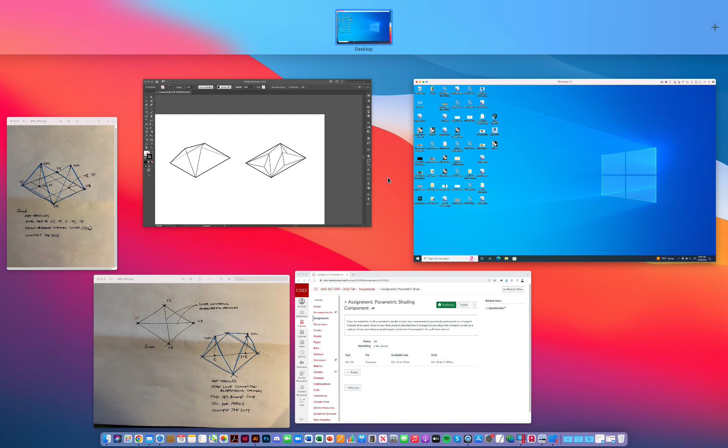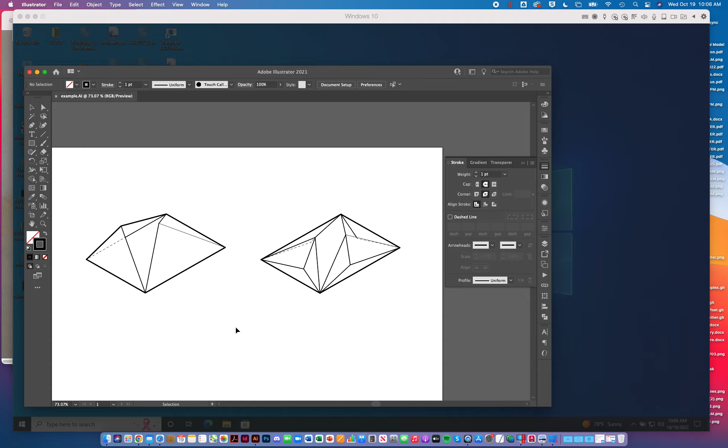Right, so, if this was me, maybe I'm doing this on paper or whatever, let's talk about it like you guys have. So you would have a prototype that looks something like this or that or whatever. Yours are all different, but you get the idea. So from the paper prototype, it's very simple. This is what I do.

I get out the paper and the pen and I just start to sketch a little bit, trying to figure this thing out step by step. Very simple diagram. Took me literally 30 seconds to do. Took me longer to write these steps than it did to actually draw the drawing. So what did I start off with? Just a quad, square, rectangle, and axon. Then I'm sort of mapping things out. Where do I need points? Where do I need to project up?

Where do I need to project out? What do I need to do in order to connect these things up in order to create these triangular surfaces that are basically folded paper surfaces, right? Okay. And so, step by step, I'm sort of thinking about this.

Let's get the vertices, the 4 vertices of this, what do you call it, this quad. Let's evaluate the surface at 2 different points, one towards one corner, one towards the other corner. Let's project up from there with the normals using that start point direction length line tool. And then from there, we get a bunch of points in space to start to connect up, right? To connect the dots. All right.

This is how I recommend you start, right? Like you look at your paper thing and say, okay, I have my frame, that's the quad, draw that. Now, I can build from this quad, how do I begin to build this component? All right, so let's do that. I'll do this from scratch, why not?

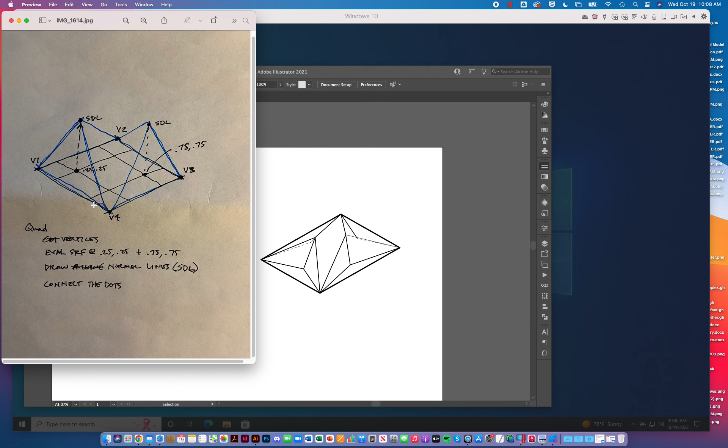Should have Rhino starting up in the background. Here we are. All right, so I'll keep this up so we can refer back to it, and then I'll keep this up so we can refer back to this one when we do a second one. All right.

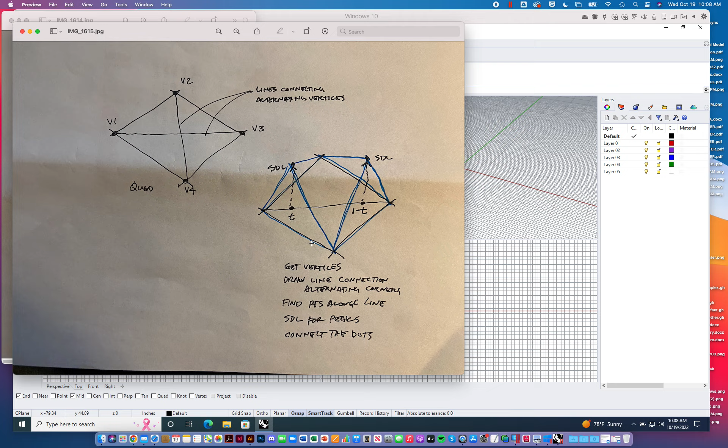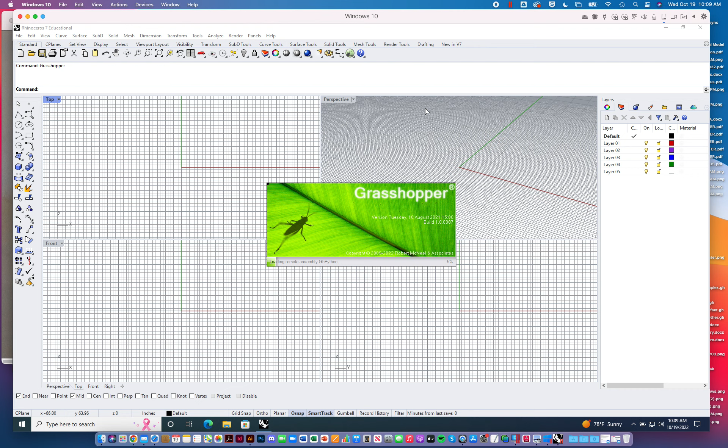All right, so let's think about that recipe. I just made my algorithm, right? This is the way to make my Toll House cookies from this quad. Just going back to the very first day, right? All right, so let's do this in Grasshopper. I'll open it up. What's the starting ingredient? What's the ingredient I need? It's not flour or chocolate morsels or vanilla extract. What is it? What do I need? Quad, yes.

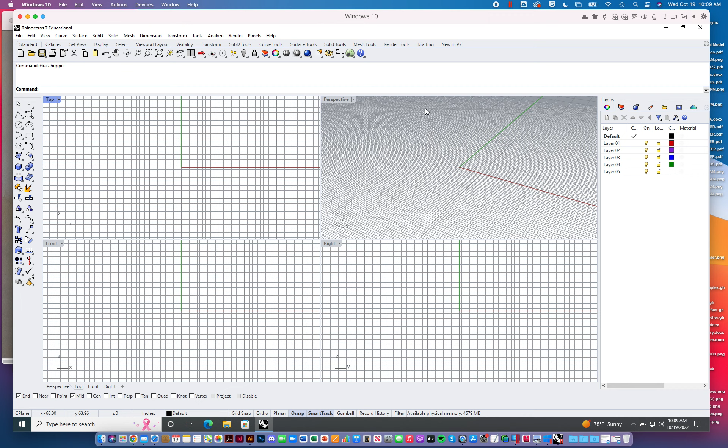I need a quad. I can make this component on any freaking quad you throw at me, right? If I make this from a quad, that's the starting ingredient, the only ingredient I need, then I can make hundreds, thousands of these, right? All I need is a quad, or hundreds or thousands of quads, right? All right, so, options. Let's see. And that's typically how this works, right? You have sort of like starting conditions, right?

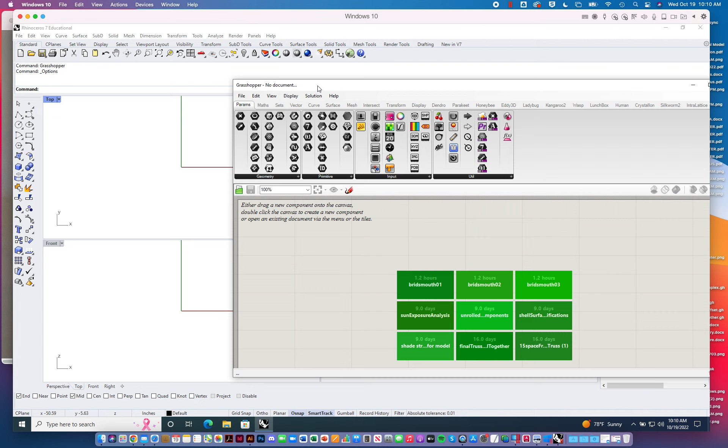Again, when I break down a surface, the easiest way to do that is to break it up into smaller pieces. And the easiest way to take a NURBS surface or really any kind of part of a building envelope is to start to break it up into quads. What are half of quads? You cut them diagonally, you get triangles, right? Very simple. We talked about this with the planar fabrication structures presentation the other day, right?

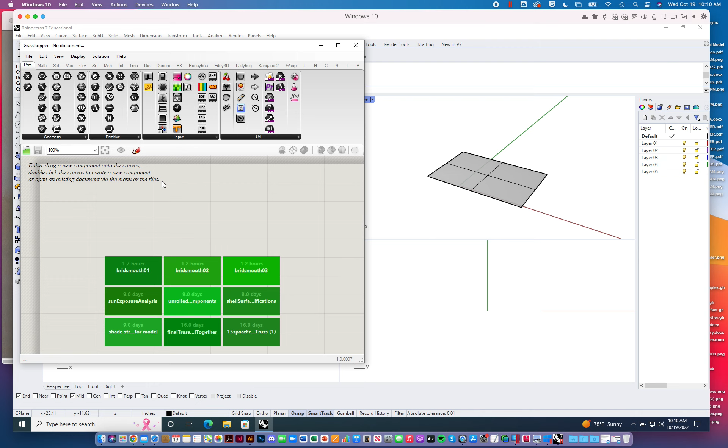All right. In Rhino, I'm just going to draw a quad. Do this several different ways. I'll just use the corner to corner. Let's make a rectangular plane right here. There we are. And I will set this to ghosted or something like that. And let's just take a look-see. All right. Here we are. I have something in Rhino. I want to bring it into Grasshopper to build up with it parametrically. What do I need to do?

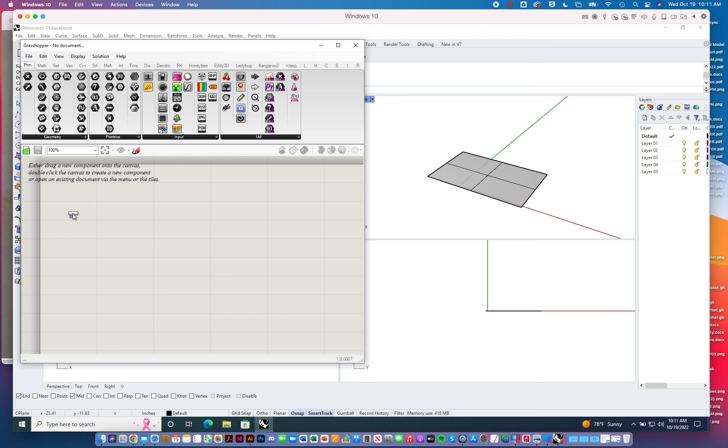You go to my params tab, right, and find the type of geometry that I need, whether it's a point or a curve or a surface or a mesh or a polysurface or a number or a vector, right? It's all here. Surface right there. And I can right click and say set one surface, Grasshopper disappears, showing me Rhino, allowing me to select the Rhino geometry that I want to reference back into Grasshopper, right? We've been here before, right? Okay, yeah. Great.

Now I can even turn this off and just see the Grasshopper preview of it, right? There it is. Ta-da. All right, so visually maybe this helps us see a little easier. What's next? Here's the recipe. What's next? We start with the quad. What's next? Yeah, vertices. That's right.

We're going to get all 4 vertices of this quad, right? Since it's a quad, we know it has 4 sides, and therefore 4 vertices, right? It even has a little face, right? And so let's do that. Let's take this piece of geometry, let's explode it to find all of its constituent pieces, right?

So I'm going to go to the surface tab, since that's what we're dealing with here. I'm going to go to analysis. I'm going to say deconstruct brep. This is a really interesting little widget here. Besides looking like some sort of piped surface exploding or on fire, just kind of a cheesy icon, right? Brep is just a fancy word for polysurface.

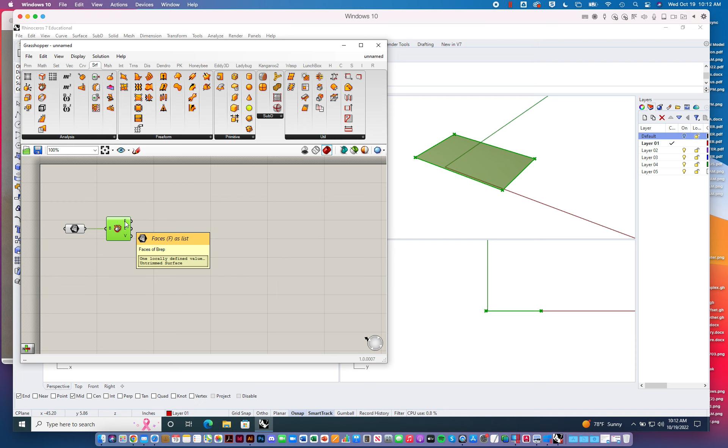Now it's going to give us any faces, any edges, any vertices. We're just going to give it one surface, so it's going to be really simple. We're going to get one face, 4 edges, 4 vertices. Vertex 1, 2, 3, and 4. You can see they're just a simple list of 4 vertices. And if I move my cursor up, I get a list of 4 edges, basically 4 line-like curves in this case.

I like how specific that is. Interesting. Anyway,

Since these are a list of 4 items, we want to be able to pick out the first and second and third and fourth and start to connect things around. So let's break each of these out. Since we're using quads, the logic here is that we're always going to have 4 items in this list. So I'm going to go to my sets. This is where I can do all kinds of things with lists and sets of stuff.

Remember way back when we used to do this, I'll pull out a specific item from this list. So here I can plug in a list. In this case, it's going to have a list of 4 items. And then down here, it asks me for an index. In other words, do you want the first item from that list, or the second, or the third, or the fourth? So I give it an index to tell it which item in that list I want. So I'm going to plug this in.

Now you notice the index is set to 0. What does that mean? So let's think about this. You guys type things in Microsoft Word, right? You know how you can have numbered lists? It starts with 1, then 2, then 3, particularly when you do outlines. Computers do the same thing. When we have a list of items, we have the first, the second, the third, and the fourth in this case. Not a big surprise.

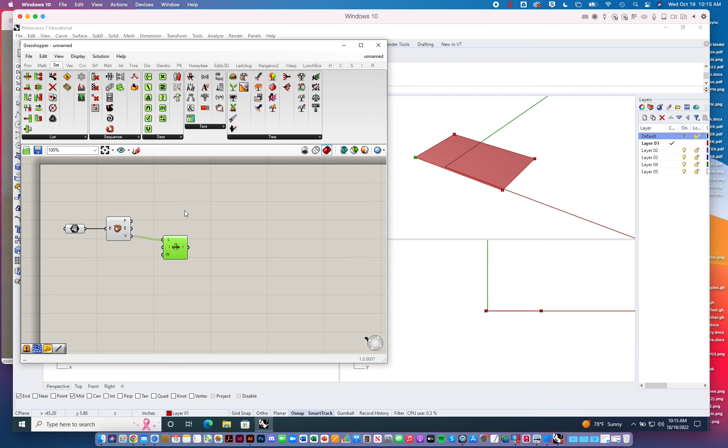So let's try it again. I'm going to copy and paste this, change the index, and set that integer to 1. So now we'll get the second item in that list with an index of 1. And there it is, 21.7, negative 0.717. Yep, it's that second one. So we can confirm that we really are pulling out the first, second, third, and fourth in their own little widgets here.

I'm just going to copy and paste, changing each one. For the third item, an index of 2. For the fourth item, an index of 3. I'm just right-clicking on the index input, going to set integer. So as I select these, there's the first vertex, the second, the third, and the fourth vertex. So we have 4 points in space now that we can use for our geometric jigsaw puzzle of simulating surfaces made out of paper, and eventually chipboard. What's the next step?

I want to start locating certain specific points on the surface itself, on that face, right? In this case, I'm saying 0.25 and 0.25. That's your UV coordinate, that latitude, longitude, right? Quarter of the way in 2 directions. And then 0.75, so 3/4 of the way, 3/4 of the way, also in the same direction. Does that make sense? I found that just looking at it and sketching it out really does help, right?

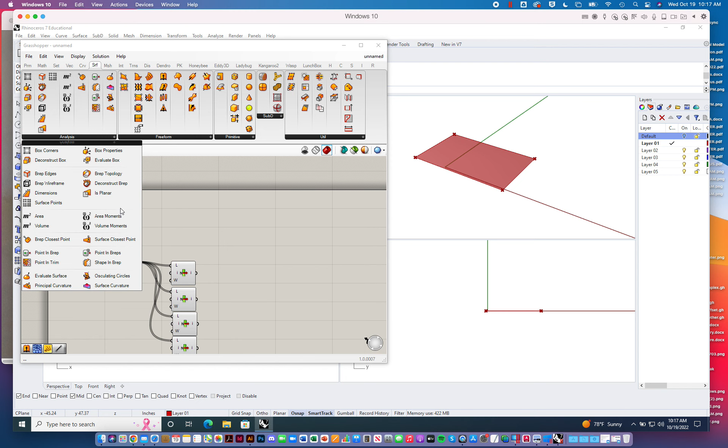All right, so we have the surface. We need to evaluate it at that UV parameter, right? And we have two different UV parameters to do. So let's do that right now. Let's see. This is a surface. I'm going to go to the surface tool. Remember, we can evaluate the surface at a UV parameter. There we are. Okay. So with a curve, we can evaluate a curve at a T parameter. Surface, we get U's and V's.

I don't know what happens when they run out of letters in the alphabet and they get down to Z.

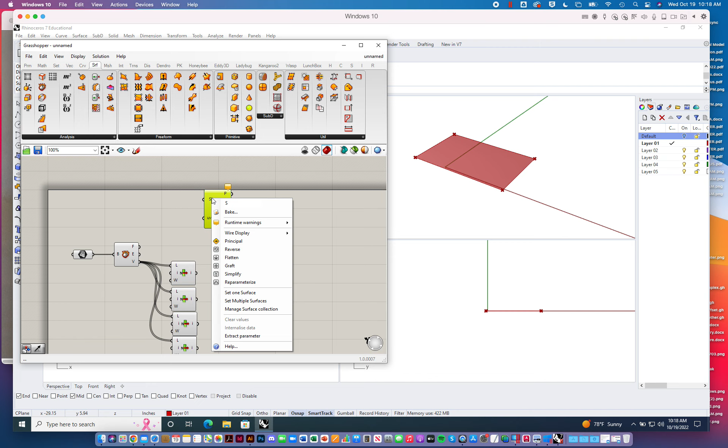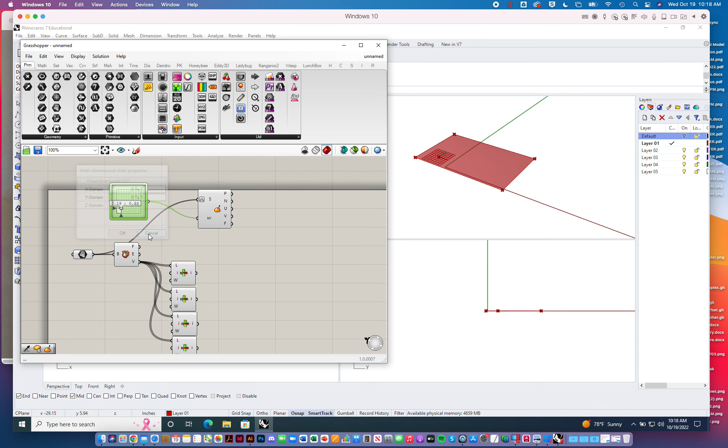But anyway, so there's a couple things here, right? We need to plug in the surface. We need to plug in the UV coordinate. We need to tell that to reparameterize the surface so it's from 0 to 1 in both directions, right? Otherwise, it might just be like some random stray length here for U and V. So reparameterize, plug this in, and just like we have a single number slider, we also have a multidimensional number slider here. So we can move this in two different directions to give us our UV coordinate. In fact, there it is. Oh yeah, look at that. Okay. I'll get this thing close to 0.25 and 0.25. There we go.

Now what's great about this is not only does it give us the location on that surface with the point, but it also starts to query a number of other properties. In fact, we can see that it populates the plane. That plane, and its orientation is tangential. So what you can do is you can begin to think about the latitude and longitude lines. If they have any curvature to them, you'll find the tangent for that curvature and then use that to construct the plane, right? That's important when we're doing a doubly curved dome, like you will be, once we take this recipe and apply it to a 10 by 10 matrix of these things across the grid shell.

For right now, however, we're just going to use a plane. It's probably intuitively obvious, right? Even if you're just casually observing, both of these lines, the U and the V's, are just going to be straight. And therefore, we're just going to have a plane that's going to sit on the XY plane, basically, right now. It also gives us the normal, so the perpendicular to that plane, which is really important as well. Okay?

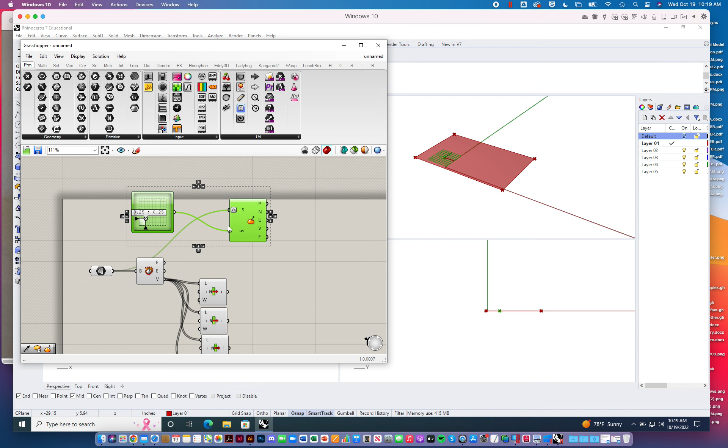Just going to go ahead and make copies of these and put them right here. And I'll just make another point. Just zoom in. Give this other friend a point here. There we go. Happy little points. This happy, nice surface. All right, so we have 0.25, 0.25, and we have 0.75, 0.75. And what's next? Well, we need to draw normal lines, so we need to project upwards, right? These dashed lines, these arrows, get these peaks, right? Just think what the Egyptians could have done with the pyramids.

But nevertheless, I think we're going to make shading components with these. So start point, direction, and length, and that's the first widget I'm going to pull out here. So I'll go to curves, primitives, look at all these line tools. There's line by start point, direction, and length. And this will be my start point. And the normal direction will be my direction. And then for a length, we'll make that a variable. We'll give it a number slider here, constrained from minimum -5 to maximum +5. Let's see what that looks like.

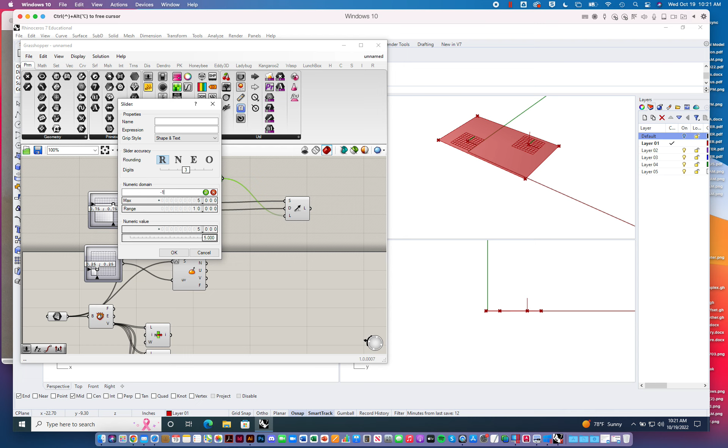Sometimes the up is down or the down is up. There we go. That works. Maybe I'll change the minimum and maximum here while I have this up: -10 and 10. There we go. All right. Great. And I'll do the same thing over here. So copy and paste this, and I'll replace the starting point and replace the direction, right, and make a line off of this point with its normal. Yeah, there we are.

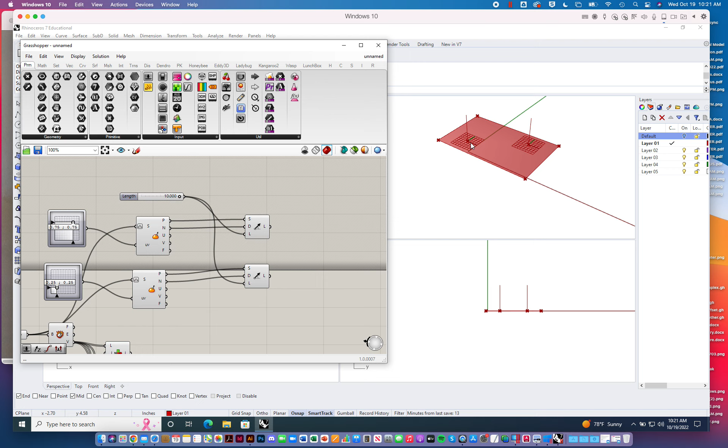All right. We have those lines. We need their endpoints, right? We need those points right where they hit in space. These are going to be our peaks in order to start connecting things up. And so I can query any curve and find all kinds of properties, including their start and their end points right here.

So part of this will be a refresher. There might be a few new tools in here, but you can go back through the video, sort of follow along, sort of understand what I'm doing. Right? So I can start to play off, and I'll do this here in another step for a different widget that adds a little more complexity, we'll start to build off of the edges of this quad. Right now, we're just building off the face and the surface itself, and then the vertices. Right? So we're starting to build more constituent geometry, same stuff we've been doing with points and lines.

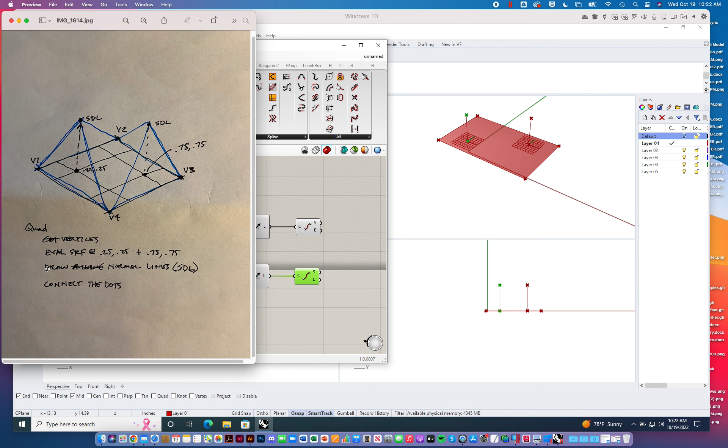All right, great. Fantastic. I think we're just about done here. Indeed, we can connect the dots. I think that's a great idea. Let's start connecting these bad boys, right? So, what's nice about triangles, and that's what I've been working with here, is that triangles are always planar, right? 3 points in space, it strikes a plane. Period, right? Okay, great. And so, if I know that they can be planar, then I know they can actually unroll flat out, right? There's no curves or weird kind of stretching, tearing, bending that might get in the way of me and my intentions here.

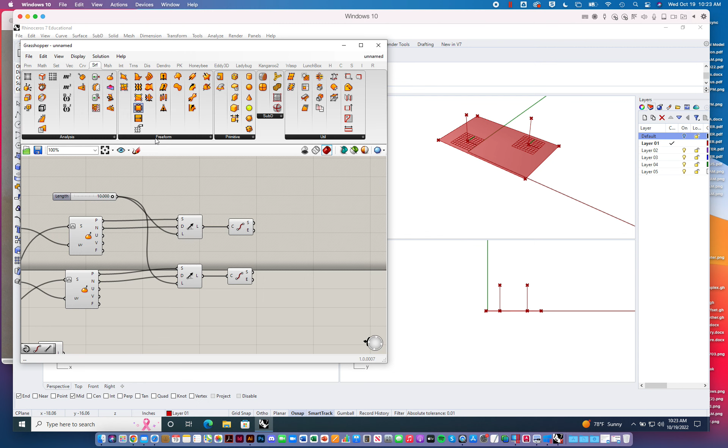So, let's do this. I'm going to start building triangular surfaces. You can see that a lot of these tools, just like we were talking about the other day in Rhino, right? Native Rhino environment. You're looking at the tools, right? There's extrude and sweep on 2 rails and loft. And, you know, they're all here, right? Revolve, revolution, whatever, right? Same thing, right? I could give it 2 corners, I could give it 4 points or 3 points or edge curves, right? So most of these have some sort of equivalent. There shouldn't be too many surprises here if you compare this to most of the native Rhino surfacing tools.

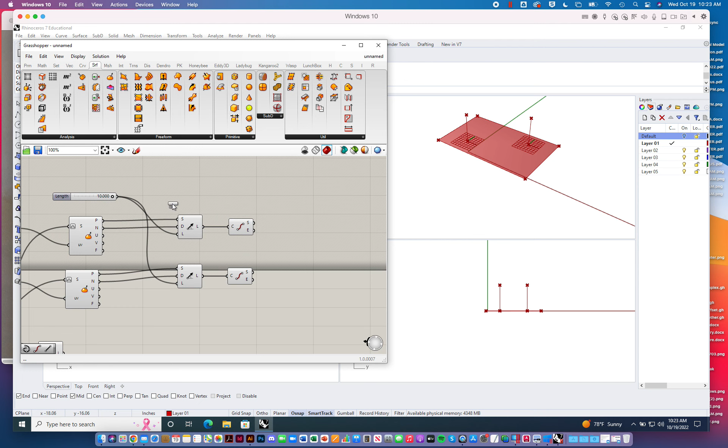That 4-point surface is what I'm going to look at, right? So you can build any surface out of 3 or 4 points. This is great. And it's literally, the inputs are 4 distinct points, right? You'll start to actually build a triangle if you just plug in the first 3. So I think this is what I'm going to use. All right, so let's think about this for just a moment. I'm going to expand my Grasshopper view here so I can see all, oh, come on, there we go. So I can see 1, 2, 3, and 4 vertices, right? I can also see these endpoints. And I'm just going to start connecting the dots, right?

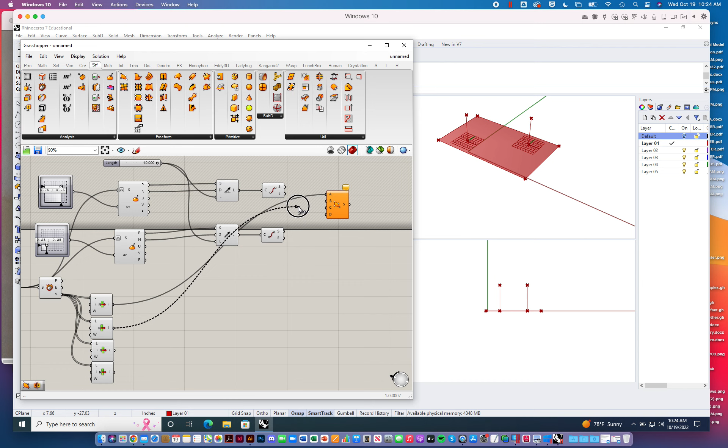So let's say I want to start with this point. Plug that in for A. I can always select the widget and sort of see what highlights green in Rhino to understand which point I'm actually selecting here. So now let's say I want this point. Yep, let's try it. So I'll plug that one in. And I want this top point. Which one is it? There it is. It's the end point for this widget. There. Yeah, not so bad.

All right, I can move around and let's see. Now I want this point. All right, so let's put another widget here. And I have to put a widget for each triangle I'm making, right? I want that point again. I want this point again. And then let's see, is it that one? Yeah, it's that one. Oh yeah, there we go. All right, so there's the bottom beak, the bird's mouth, so to say, right? Okay, so

let's do this again. Why not? All right, I'm going to be connecting this to this to this, right? Let's try to move these in place. This to this to this. All right, so let's figure out where these points are located. There's this one. So plug that one in, and there's that one. Oh yeah. And there is that one. Start to understand maybe cognitively the relationship here, right?

I made a copy and paste, and they kept all the connections. So I'm just going to say disconnect really quickly. And sometimes that can be more confusing than it's worth trying to save time from moving your cursor up here. So let's see. I'm going to go from here to this. So let's see. There it is. So there to here, and then back to here. All right.

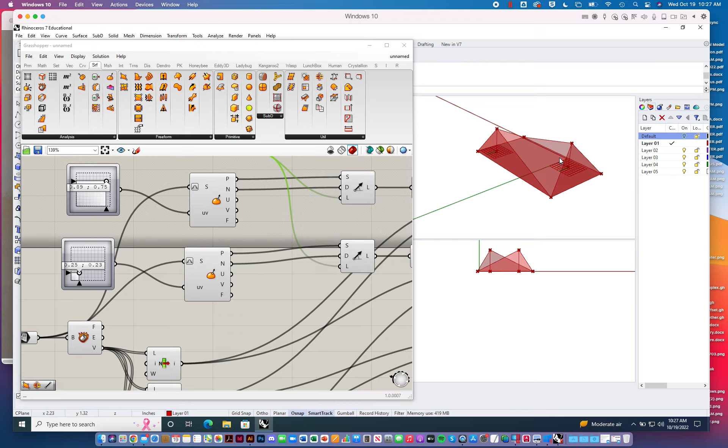Well, I can tell how excited you guys are. Instead of dull expressions, I see like a hint of a smile occasionally, and like somebody under their breath saying, "Gosh, let's do this finally."

All right, so similar, right? What do we start with? The quad, right? Okay, yeah. I'm not going to beat that horse here. What am I doing then? I'm connecting alternating vertices, right? So I'm making an X, right? So I'm taking one corner, the alternating corner, connect them up the line. Same thing with the others, right?

And I take one of those lines and I identify a point along it. T, then I subtract T from 1 and place sort of a, how do you say that? Not congruent, symmetrical sort of point on the other side, right? So as this distance gets larger, this distance gets larger. So they move together and they're constrained along this axis. Now I just have one slider and it changes to open or closed, right? And then more open or all the way closed. All right.

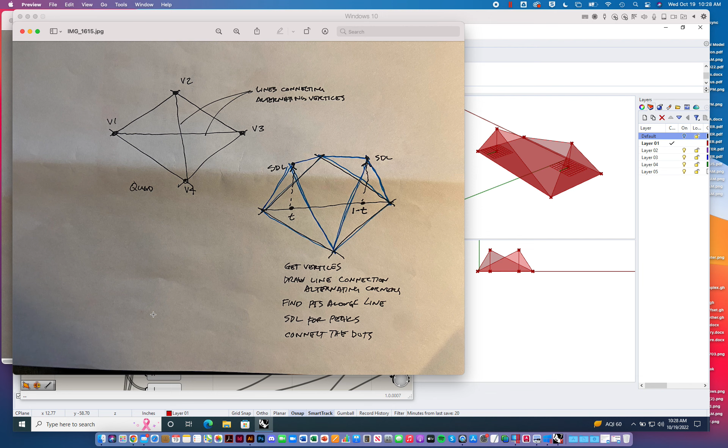So we're doing it slightly different. Instead of sampling the surface for two UV coordinates with those points, we're drawing a line across and then we're constraining it just so that we're getting those peaks along that line, like a rail car. Okay? All right. So yeah, why not? Let's try that. Now, if this was you, I would say save this and then save as, and you can start to modify this. Instead, I'm just going to go and yep. Okay, back to this.

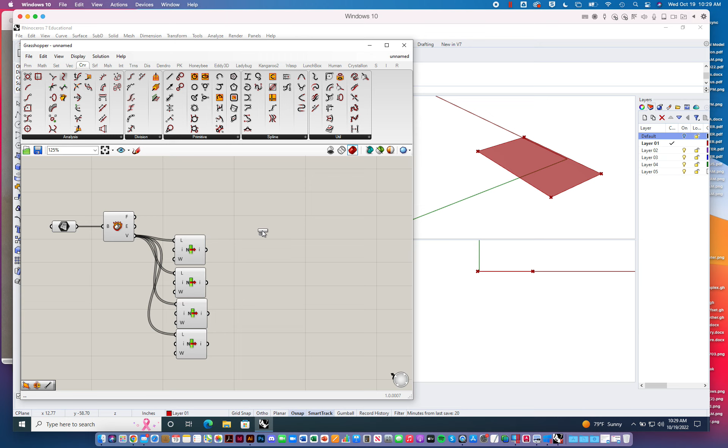All right. So I have my quad. I've blown it up and exploded it into its constituent pieces, including 1, 2, 3, 4 vertices. Right. The next step. Let's draw a line. Let's connect up those vertices. Let's make an X. Here we go. I'll connect this point with this point, right? The alternating vertices, and we get an X. I can do this with the other one as well if I want, the other set.

In fact, if I do this across a whole grid of quads now, I get a diagrid, right? It's pretty cool. Anyway, so if you like diamonds and are into Norman Foster and Jean Nouvel, maybe, this is right up your alley. However, I really only need one of these. Yeah, so let's just take this line.

All right, now, let's refresh our memories. It's been a little while, but you were here with trusses, right? We can divide the line, or we can just give one T address and find one point along that line, right? Let's do the T parameter. Go to the curves. There's that T parameter. Evaluate curve at T parameter. We'll plug this in. Similarly to the surface, we'll right-click on that input and say reparameterize it, right?

What that does is this line might be like 29 units long, right? 29.6001. So what we want to tell it is that this is 0 and the end is 1, right? So as we parametrically start to work within that, we can snap to the midpoint with 0.5 or a quarter point with 0.25, or snap to one of those ends with a 0 or 1. We don't have to try to guess its length, which is really odd, and very situational.

Okay, so we need to give it a T parameter. In this case, I'll just give it one number slider. Here we go, just the standard old college try here. There we are. And go to 0, 0.25, 0.5, blah, blah, blah. All right. So let's say we're going to put one somewhere over here, similar to our 0.75, 0.75, right? But in this case, it's never going to deviate from that line, that diagonal that we just drew.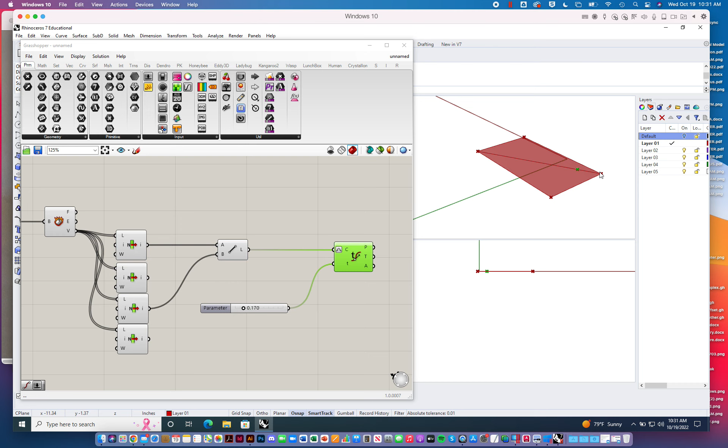Yeah. All right. Now, if we want to have something from the other side, right? This is 0 and this is 1. What we can do, since we know that this is 1, we can do a little bit of basic arithmetic.

You guys might have heard of this. It's called subtraction. Right? And so what I'm going to do is I'm going to say 1 minus whatever that T parameter is, right? So I'll plug in this as the input to subtract from A. And for A, I'll just right-click and say set the data item as 1. Okay, so 0.83. And this is set as 0.17, right? So 17% along the way from the start, we'll get a point. 17% away from the end will also get a point, right? 83% of the way from the front end. All right.

Happy routing, I guess.

All right, so here we go. Right, now we get this point as well as this point. And they both update like that. They even kiss in the middle. Look at that. All right, so. Right, what's next? It's mostly from here, just like the other recipe, right? We got to project up at start point, direction, length, find those peaks, and then start connecting the dots again, right? All right, let's do that really quickly.

Right. So I'm doing this for this bird's mouth thing, and maybe some of you have something similar, and if so, man, you're really getting some ideas here. But you, over the weekend, are doing it for your component. If you need to start to make adjustments, that's fine. I wouldn't go too far off what you were trying to do. If you need to simplify or start to understand that maybe you didn't quite get the logic of the full triangulation, and now you need to start to triangulate some things, that's fine, right?

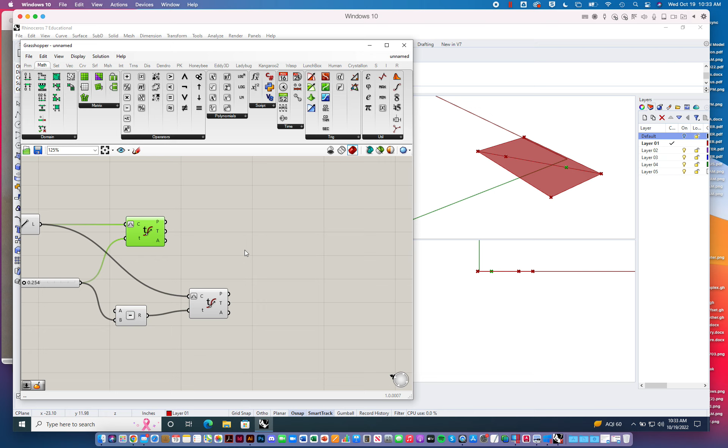Okay. I would argue that every step of the way, whether we're drawing it, modeling it, prototyping it out of paper, prototyping it digitally, every step of that way is part of the design process, right? So if you need to start to adjust things, do it. Go for it. Okay. So what do we need to do? Oh, yes, right. Up. There we go. All right. So let's see. What we're going to do for that.

So I can project up a certain length from each of these points, but which way is up? In this case, it's Z, right? Because I just drew a generic planar surface on the XY plane. But if I suddenly change the orientation of this plane, right? I need to look at this surface and find some sort of normal condition for the surface to use as the direction, right? So then if I change the surface, its orientation, everything will change along with it, right?

If I just use Z, and I rotate this 90 degrees, right? Then suddenly everything will be flattened out because everything's projected in Z. But the surface is also lying in the XZ plane, right? So that wouldn't be any good, right? We always want to be sort of perpendicular to the surface as we project out, right? In this case, it happens to be up, but it could be to the side, right? Particularly if this is, let's say, a panel on an envelope to the side of the building, right? Suddenly you have to project out. Project perpendicular to that plane, right? Okay, so

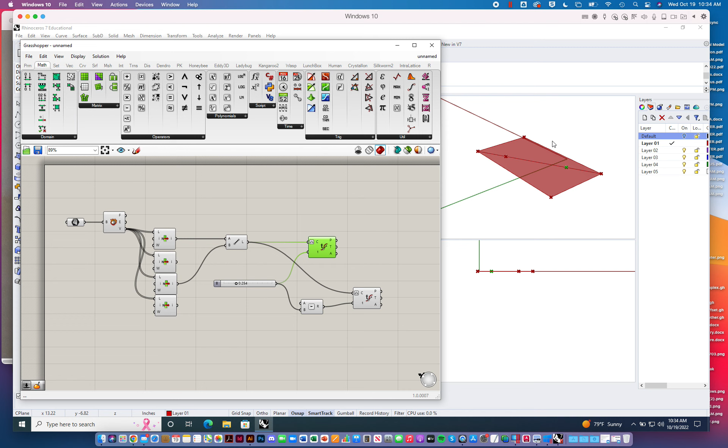fortunately, we can do it similar to what we just did before, right? We can evaluate the surface at a UV parameter. Evaluate the surface. There we go. And plug in the surface. We'll reparameterize. And then we'll just give it, this is already set to 0.5, 0.5, right? It's going to give us that normal direction there at the midpoint, right? This is great since this is a plane. All we really need to do is sample one point on this and we understand where the normal is, right? Okay, great. So now we're ready to start to project upwards again.

Start point, direction, and length. Here's start point. Here's our direction we just made. And a length. I guess I didn't have to blow away that old, well, okay. Let's see. -10, +10, I believe is what I used before for the minimum and maximum. And we'll plug it in there, make a copy and paste, just replace this. There, yeah, not too bad. Right.

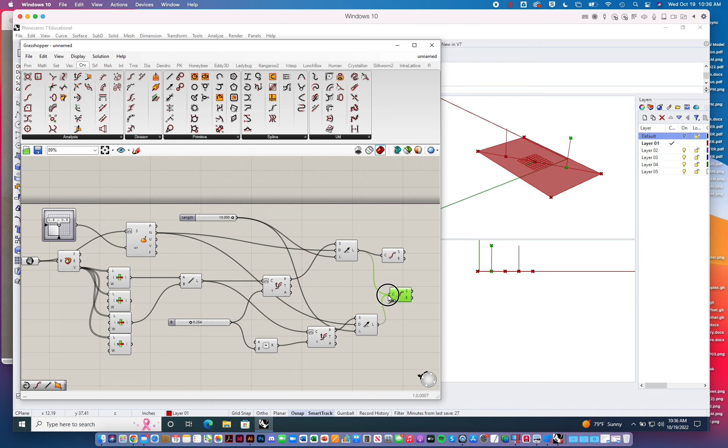And we need to find the endpoints then of those verticals that we just drew, right? Yes, same as before. Right, we want to find the points because we're connecting points up with the triangles. To make these triangular surfaces, the ingredients are points, so. All right. And from there, let's see. Let's do this. I'll just quickly try to figure this out here.

Move from here to here. Let's see, where's that? So we have this to this, so this guy over here. So it'd be this one. Oh. There. All right, let's do this again. Yay, this never gets old. Actually, it does. All right, so we have that, and this, and this one. Yeah, there we are. So there's one half of the bird's mouth.

Do you ever look at these and go, these really need to line up? You know, you can do that here, and then actually space them apart with these. Yeah, right? You'd think I would do that, but anyway. Sometimes it's helpful to try to line these things up a bit, especially if you come back to this a month later and you're like, what the hell is this? I don't even remember, right?

Okay, so let's see. We can go from this point to this point. I believe it would be that to that. Yeah, okay. So here to here to there. And last but not least, this one to this one, and also to this one. There we are. Ta-da!

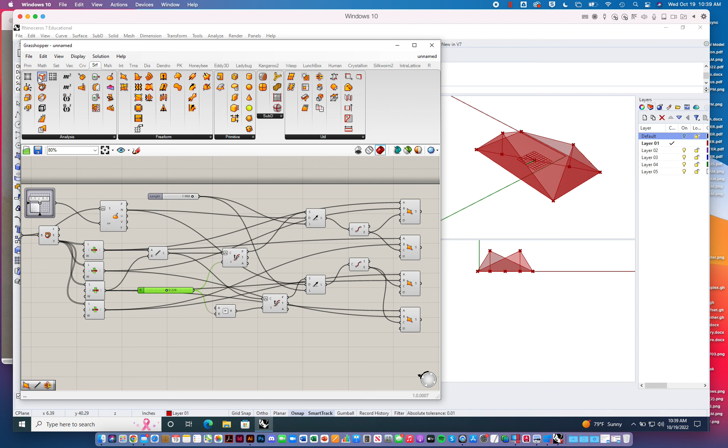We can multiply this by -1 before we plug it in here. Watch. Then we just go back to our math and do a little multiplication widget. Multiply this, it's a number slider, so it'll change that variable. Take whatever it is and multiply it by -1. So we plug in -1 for the bottom, and we plug that in down here. And now suddenly we get this. Hot damn, now we could go further than 0.5. That could actually be pretty interesting. Oh, this is like the mother lode. This is like shading component euphoria, nirvana here.

All right, so you can begin to play around with this stuff. Maybe play around and show me 3 different ways of how resilient this component is to respond to particular conditions. You can change the shape, it can open, it can close, it can go in between. It's kind of an interesting multivalent way of thinking about these things. You can make them perform in a number of different ways with very small change in the numbers or the order or the rules, right?

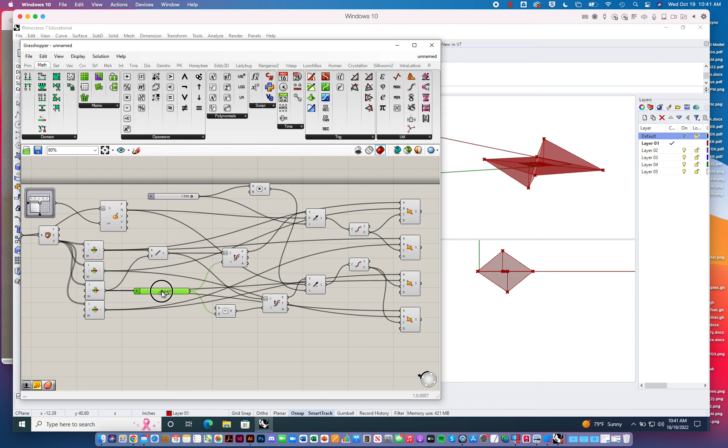Just like any recipe. You swap out vanilla extract for peanut butter and you get a completely different type of cookie, don't you? Same thing here. The small change in the recipe can lead to disproportionate change in the output, the quality of it, or the shape of it, or the way it works in the world. Okay, which is great. I think systems like that are always pretty interesting. They're much more interesting than the boring ones that architects usually deal with, like this. Restack them. Okay, anyway.

Does that make sense? Right? Do you guys feel okay about this? Remember, try your best. You try your best, I can always tell. Because even when you're like, I've failed completely, and you come to me with questions, sometimes it's really poor timing, like Friday evening or something like that, and I go, well, okay, yeah, that's great, right? Fail early, fail often.

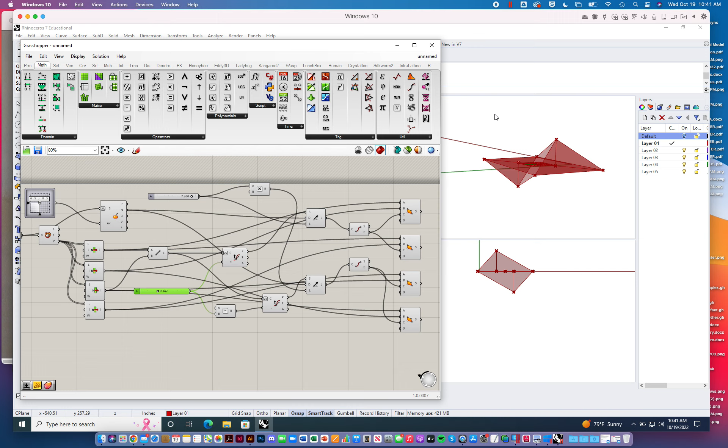All right, so here we go. Should we make this even different? Yeah, we can always build off of this, right? We sure can. In fact, let's do that right now. All right, so I was actually thinking about this little guy right here. And so if we wanted to introduce

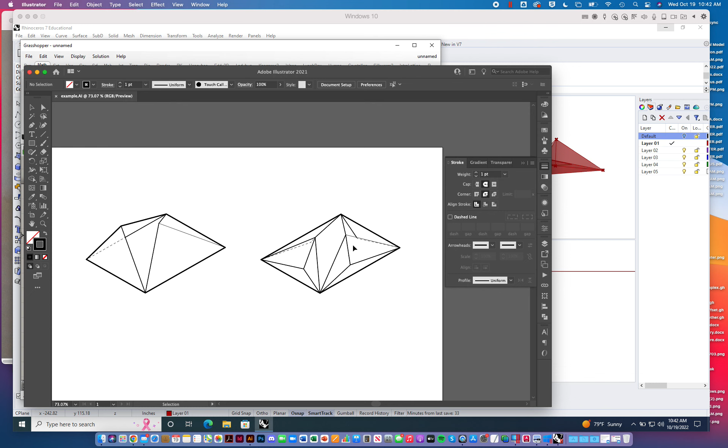an additional fold that goes from the peak down to, let's say, the midpoint, and then start to push things in. What we can do is we can actually draw a line from midpoint to midpoint to midpoint to midpoint across, and then again find points along that, and then we just start to make additional triangles, right? So instead of making one big triangle for each side, we make two smaller triangles that meet up in the middle, and that middle point is something that can inflect and move along that line, right? Hold that thought. Let's demonstrate that, right?

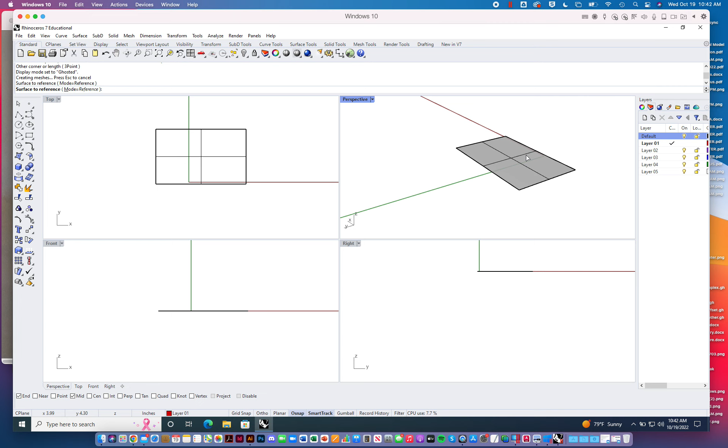Okay, so new. You're like, wait, what happened? Right? Okay, there we are. So let's bring this in again, parameter. Let's find surface. There it is. Right click, set one surface. Grasshopper disappears, allows us to pick the constituent piece of geometry in Rhino that we want to reference back into Grasshopper so we can build off it parametrically.

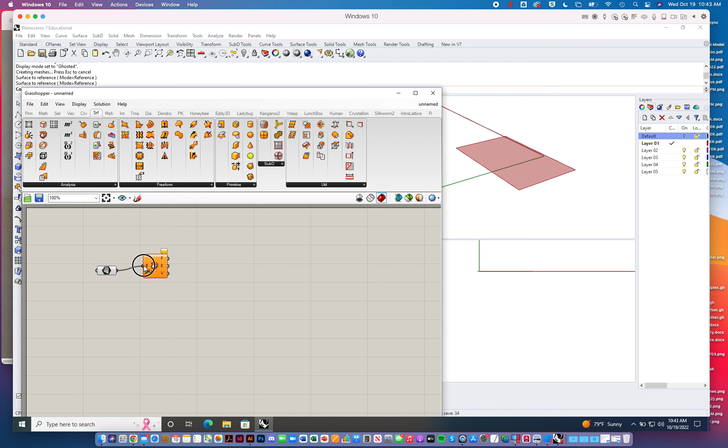There we are. All right, so if I got $1 for every time I said that, I would be retired. Yes, so let's talk about what we're doing here. Right, we have this quad, we're going to explode it just like before. Yep. Sound effects are, of course, optional, but always appreciated, at least to me.

All right, and then this time instead of vertices, we're going to play with the edges, right? So here's a list of 4 edges, right? I mean, it's not hard, right? This is a quad, it's a rectangle. Well, not even a rectangle, it's a quad, it's a 4-sided polygon, right? And actually it's going to have 4 sides or edges, right? That's what that means, edges. All right, so the sort of curves between the vertices.

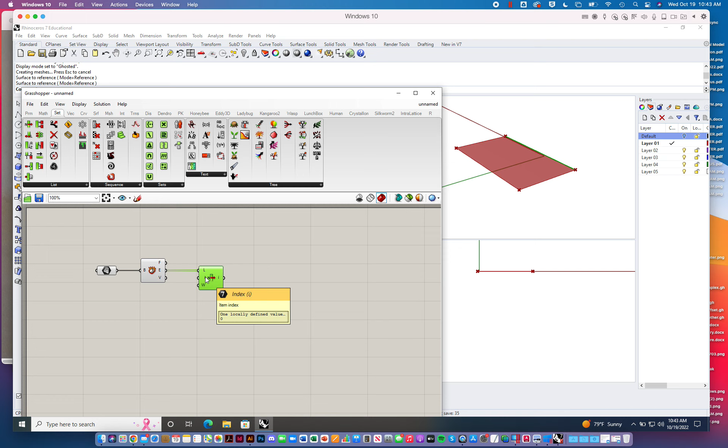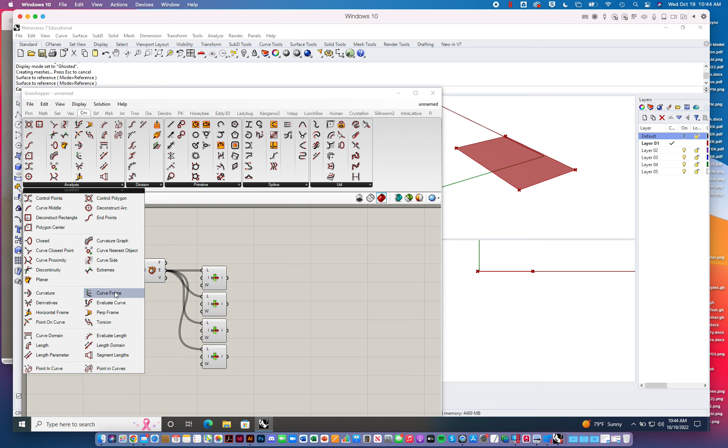what's next? Oh, right. We're going to take each of these edges. We're going to find the midpoints along them, right? All right, let's do that. These are curves or lines, right? Line-like curves, actually, it says. Look at that. Something satisfying about seeing that. I don't know why. All right, so let's see. We'll plug this in. We'll reparameterize it. And then we'll give it 0.5 as a t parameter in order to find the midpoint, right?

0.5, click, plug in, copy and paste, paste. Might as well line these up too. It'd look really weird if they weren't now, right? Oh, yes, and then plug in each curve the way we need it. There we are. Yeah, look at that. Okay, so we have a point there at each of those midpoints. And if we wanted to, we could take alternating ones, right, and do the same thing. Yep, there we go. All right.

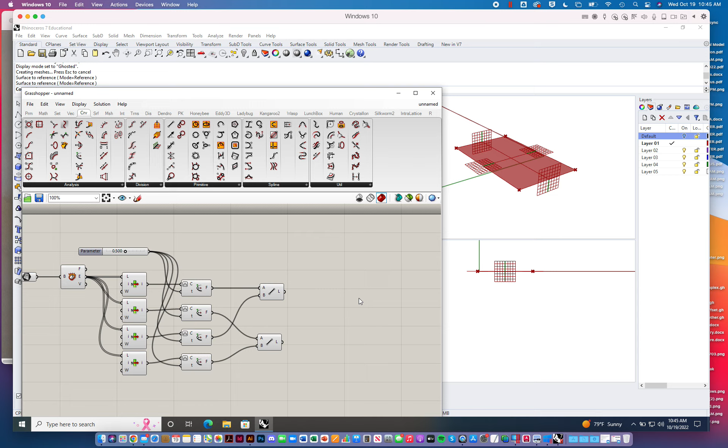You know what's interesting about this one? Maybe I'll change this up a little bit. You know, instead of making it just the open and close like this, what if I just build a peak for a pyramid there, and then the openings are just happening over the edges, right? So you can begin to sort of play around with this and redesign or sort of begin to modify and change things as you go, right?

So if I wanted to find the intersection of those two lines, right, in space, I could do a line-line intersection, right, a curve-curve intersection. That works really well when we have a planar quad, right? Because then this is always going to intersect with this. But if we have something that's actually kind of doubly curved, you might have lines that look like from the top that they intersect, but when we look at it from the side, they might not, right? So in this case, I'm just going to go ahead and find that midpoint along the surface, right?

We can do that by evaluating the surface at a UV coordinate. UV would be 0.5, right? Halfway in both directions, right? Okay, so is this, with a little bit of practice, starting to make more sense?

Practice is what helps. Even my awesome YouTube videos are of limited value. Awesome, whatever. If you don't practice, right? You don't become an expert by watching a YouTube video. It's by hours and hours of applying stuff, right?

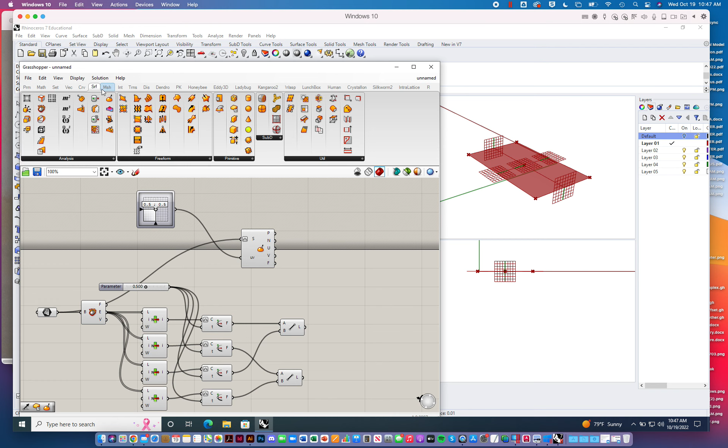There we go. And in fact, what that also does is it gives us the normal direction as well. All right, so start point, direction and length. Let's see, curve, here we go. Start point, direction, and length. Here's the start point, here's the direction. For the length, let's, man, I wish I could just set this as default for, well, I guess actually 0 to 1 is actually pretty handy. There we go. Just make a peak point there.

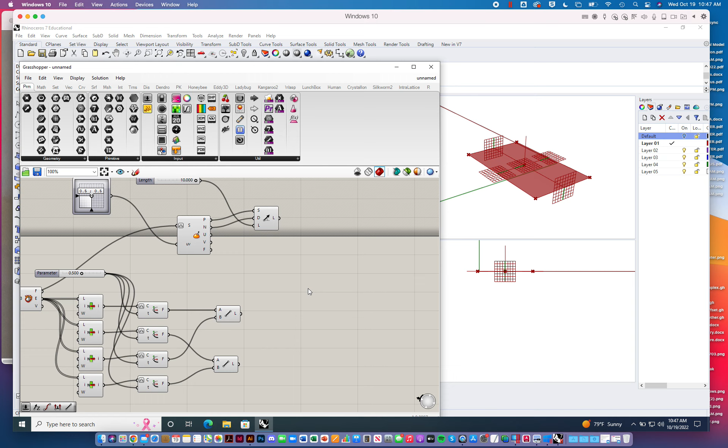All right, now back to these lines, because that's what we were here for. So just like before, when we were constraining these things to 2 points on either side of the line and they just converge to the center, we did a similar thing with these new lines that we drew from midpoint to midpoint across the quad. Almost sounds like we're talking about a geographical place, like we crossed the quad at the university. All right, so,

right, so curve, we evaluated a t parameter, right? We gotta find some points along this curve. That's the tool to do it. We give it some sort of t parameter, t value, t address, and then it places a point at that address, right? So here's the curve, gotta reparameterize it. And there's a number slider. All right, there we are.

And not only that, but I think before, what did we do? We also took this value and we subtracted it from 1, right? So that we'd have a point on the other side, the same distance away from the end point as this first one was from the start point. All right, so subtract this from, and for A input, I'll say 1. That's never going to change. I'll plug that in for this t, right? Now we have these two. You can see them moving together. Love it when a plan comes together.

Okay, let's see. Copy, paste. This time we'll use this line for these, right? Aha, success. Look at that. Can you guys see that? See the green points right here? This is like synchronized swimming. Dun, dun, dun, dun.

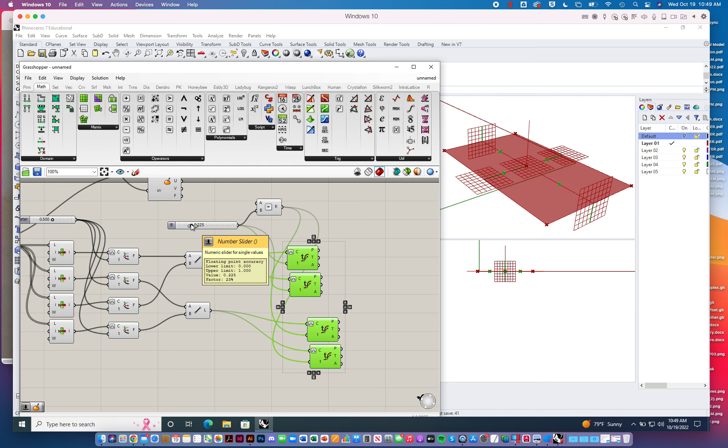The more points you get, the harder it is to keep them straight, right? And so that's why I like to try to rearrange these so that geographically, I start to make a quad with them, so I can cognitively understand which one's which when I'm facing the model. Or if something's up high, something's down below, I start to place them in the y-axis accordingly.

So let's see. There's the start point, direction, length. So there's the end point for that bad boy. And let's go to surface. Each of these are going to have that peak in. So before I copy and paste anymore, I'll plug that in. Now I'll make a copy of that. We're going to have 1, 2, 3, 4, 5, 6, 7, 8. Aha, 8. I have to do this 8 times? Oh, yeah. All right. The things I do for you guys. All right, 4. There we are.

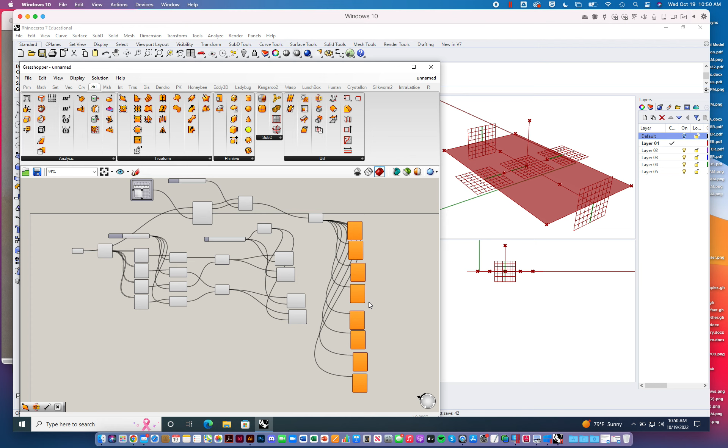Great. And now you're starting to see that this precious screen real estate really matters, because I'm trying to see what's going to happen in Rhino with my perspective view, at the same time trying to isolate widgets in different places, right? So this is where I might start to rearrange things like this, so I understand which one is which. So this one is here, right? I'm forming a similar polygon to the one these 4 points form, just to keep them straight. Otherwise, it gives me a headache just thinking about this. What's this one?

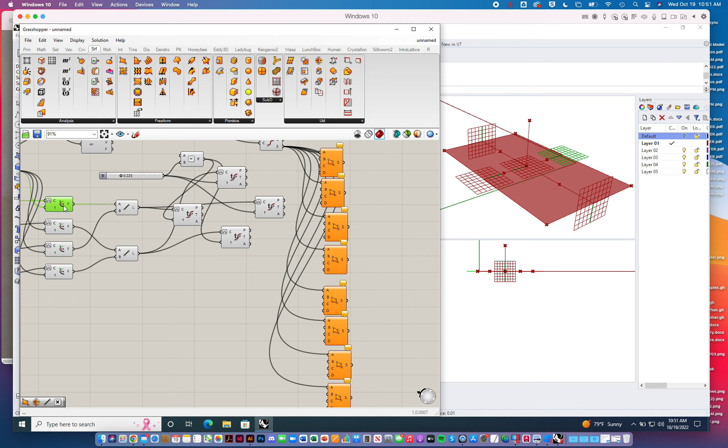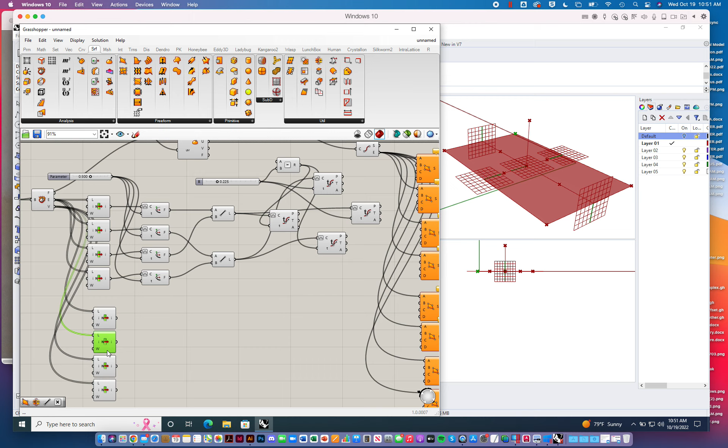We still need to get the vertices out, don't we? Okay. Well, we can pull out 4 items, the first, second, third, fourth, with these. We'll just make a copy of them and replace edges with vertices. There we go. Oh yeah, look at that. 1, 2, and we can arrange these as well. So there's that one, and then there's this one up here, and there's that one. They go around counterclockwise in this case, to my view. Interesting. All right. That's just super duper.

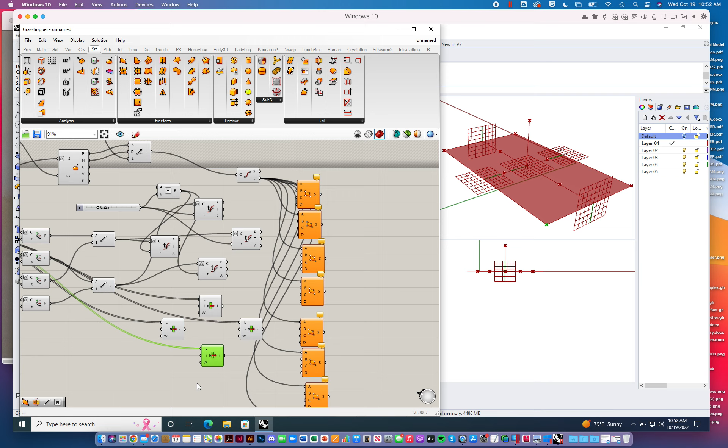All right, so, yep. Let's try it. I have this one down here. I have this one up here. Let's start here. I'll plug this in for B, and I'll plug this dude in for C. There we are. Oh, so far so good. All right, and then where I left off here, let's see. This one needs to plug in, but then also this one needs to plug in, right? Yep, there we go. Now let's test this.

So far so good. We can make this thing look like it's sort of like inhaling, exhaling, right? Or letting more water in or less water in. They can start to sort of umbrella, telescope in and out in particular ways. And in fact, there are ways to actually make this into some sort of connected device. The key thing is that if you look at this as a triangle from the side, those sides are always changing their length, right? So if you don't constrain things to their length, that's the hardest part with that, right? But you have to start doing a bunch of polar coordinates and things like that in order to do some vector mathematics.

Again, I don't want to make my head hurt this time of the week. So I'll stop mentioning those terrible, terrible terms.

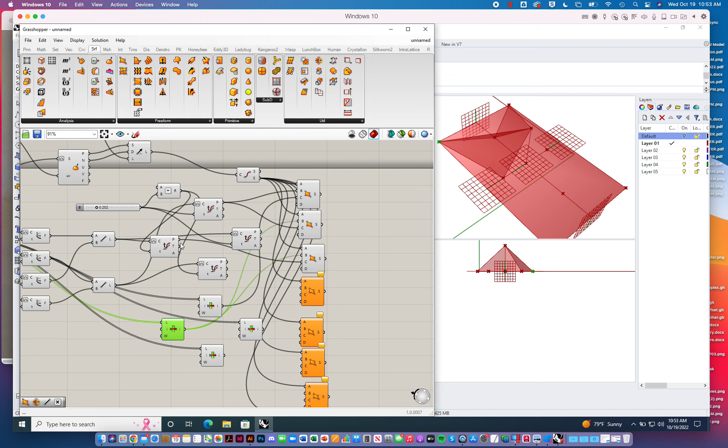All right, so let's see. There's that one, and I need this point right there. Oh yeah, look at that. And I need this point over here as well. And I need to plug it in with this one. Haha. Great. Yep, so you can see what I'm doing, right? I'm just sort of making my way around this thing. And, yep. So let's see, this point with this one, that would be this one here, yep. And this one with this guy right here.

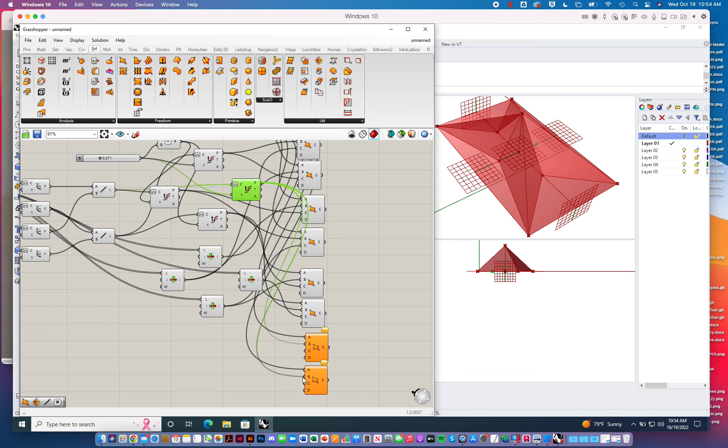And I just keep going around. Let's see. So wait, this one here. This one's going to go for both of these. So I'll just plug them in for both B's. And then we have this one down here. And then we have this one up here. Oh yeah, look at that. Okay, so now I can begin to sort of make this thing open up or close, right?

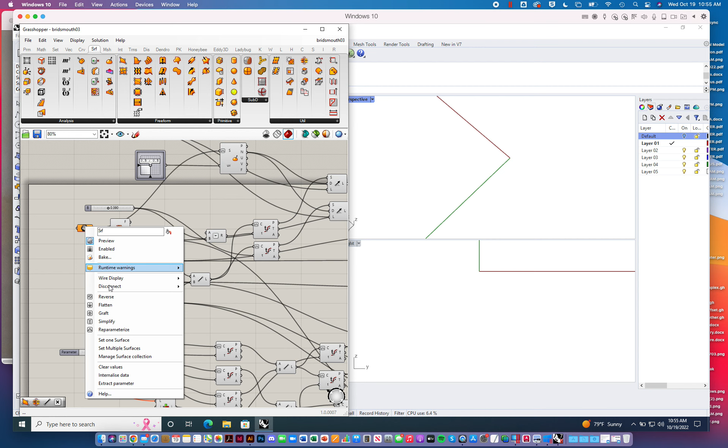Great. Now if I'm going to combine this with bird's mouth, I can copy and paste all of this mess, spaghetti bowl of stuff, into the other one, and just start to make sure we connect up everything accordingly, right? It looks something like this. Bird's mouth 03. There we go. Yeah. So it's a little messier. Set one surface. Let's turn this on. Yeah, there we go.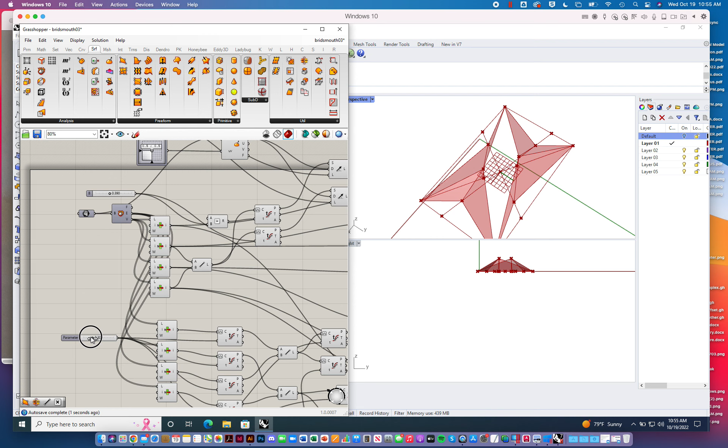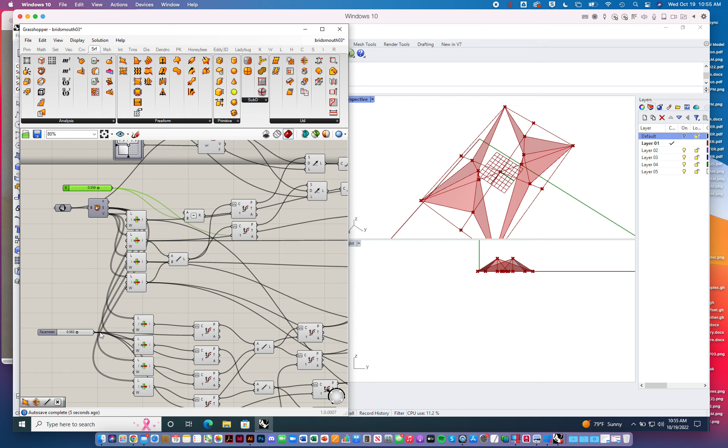Let's turn this off. Let's turn this off. Yep, there we go. So now we have, oh, we can even, oh, look at that. I forgot about that. That's so good. All right, so we can open and close the periphery. We can also open and close the center, right? In fact, in this case, I'd probably constrain this to 0.5. Right. And then, of course, we could always add a little bit of a twist if we were really going at this. Wow. Incredible.

All right, so you can begin to see that the sort of matrix, depending on how many variables you have, the matrix of possibilities starts to exponentially multiply. Right? Now what's interesting about this is, I mean, it's okay as a component. Now imagine somebody saying, "Where are these bad boys?" and they start to change, right? You don't have to do this over the weekend. Am I clear about that?

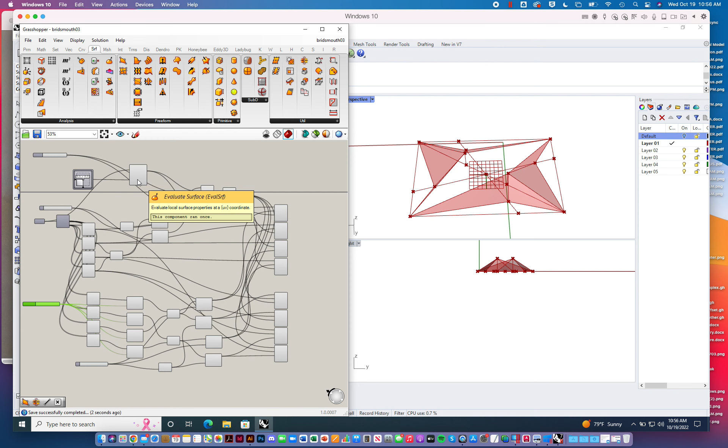What I'm about to do next? Yeah, let's plug in a list of quads. Why not, right? I mean, what's the worst that could happen? He said right before his computer blew up and exploded. So anyway, let's see. Instead of a quad, let's do, oh, I know. Here, I already have a surface or two in mind. Space frame truss, grid shell example.

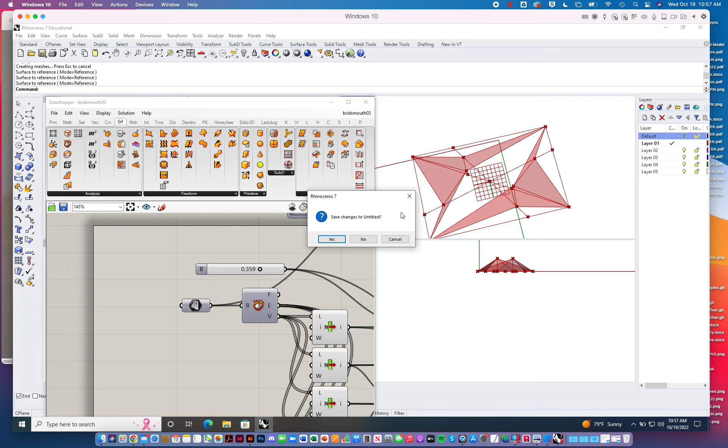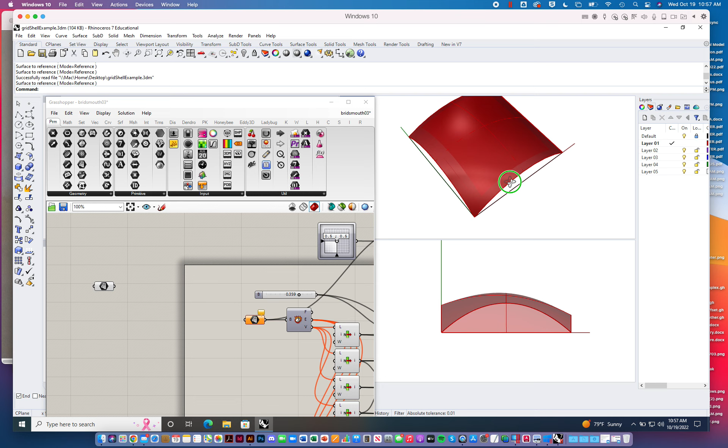Yeah, let's do the grid shell example. Why not? Nope. There we are. Yeah, whatever. So let's bring this surface in over here out of the way for a moment, and let's start to do something to it. Right, so the next step that we'll do in this weird process

Why is there a red? Oh, I see. It's because, got it. Silly me. Okay, right. So here's a grid shell sort of, or shell sort of geometry, or whatever. Let's see. I want to divide it up, right? I want to divide it up into a set of quads. So again, you don't have to do this part over the weekend at all, right? But I'm just sort of showing you where this is going.

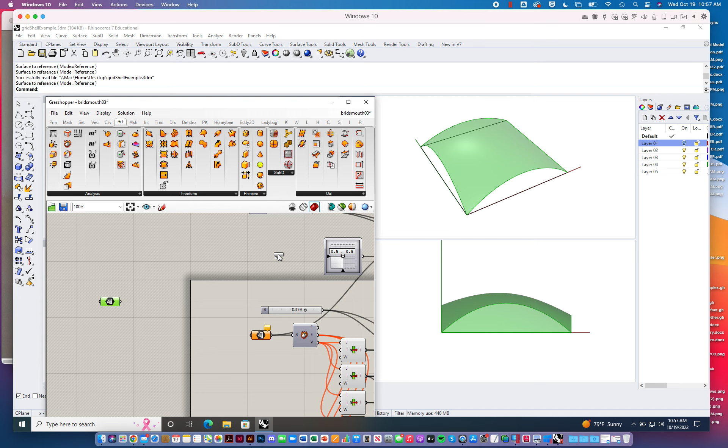Trim this out, the two-dimensional domain. What kind of two-dimensional domain? Let's determine that. Divided two-dimensional domain. Here's the U and here's the V. 10 and 10. It's already set to 10 and 10. That works. Base domain. So let's make a two-dimensional domain. Construct a two-dimensional domain from 4 numbers. 0 to 1, 0 to 1. That'll work. Plug that in.

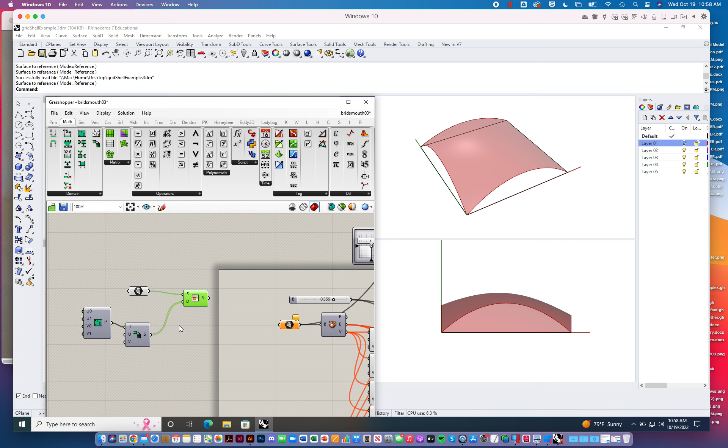Actually, here, let's plug that in. There we are. Oh yeah, look at that. So now we have 10 divisions in either direction. We have a checkerboard of 100 quads. All right, now, let's see what happens. And it might blow up, right? So the thing is, here I have one surface, right? And so it's easy to get 4 things, because it's a simple list.

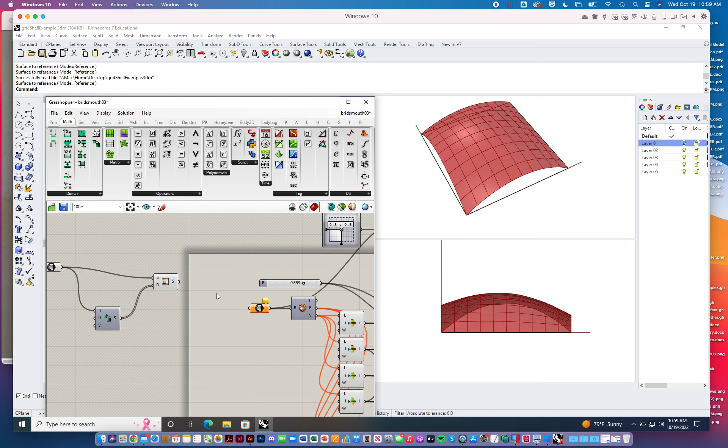As soon as I plug in more than one surface, I'm going to get a list of lists, right? So I have 100 quads, and each of those have 4 vertices each. So I'm going to have 400 things. I'm going to basically have a list of 100 4-point lists, right? Kind of weird, huh? So we're going to have a data tree, and let's just see what happens. I've seen worse things happen. Okay, so far so good.

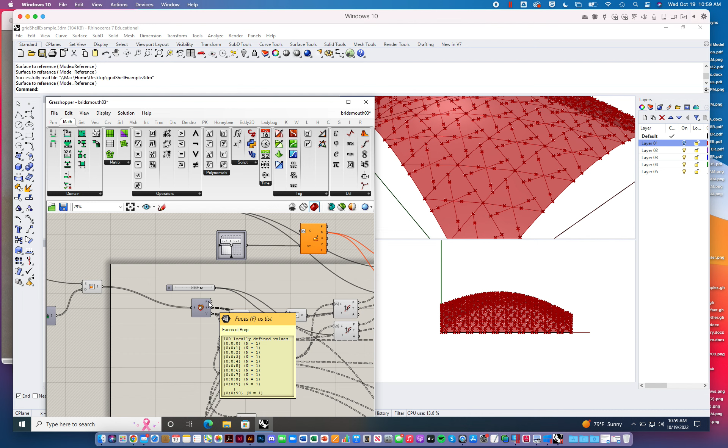Now, here we have an issue, and that is each of these faces. There we go. Oh, I'm so smart. And modest. Oh boy, okay, so let's see. Let's turn the preview off here, let's turn the preview off here, and let's see what we have. Oh yeah, look at that. So now, as a group, we could begin to open these things up or close them down, right? Or twist them, or turn them, or open them up or close them down, right?

And the other thing that's interesting is right now we're doing that globally, so we have one value for this or that or the other, right? But if we said, well, this is facing southwest and that one's facing northeast, and we actually get the solar values for how much solar data is hitting this, and we say that one's extreme, needs to close up, we can begin to give individual values for these and start to create gradients, where some close up and they gradually open up, right? Depending on where those red and blue areas are in that false color map, where the solar radiation average over here is, or whatever it is that we're measuring.

I'll actually give you, for our exercise on this, several lightweight directions that you can begin to optimize for when it comes to this, right? So we actually close that feedback loop. Instead of saying, well, does this shade? Now let's adjust and then let's remake it and take it outside in the sun and see if it shades better, right? We can actually take the solar radiation values, plug them in as part of the recipe

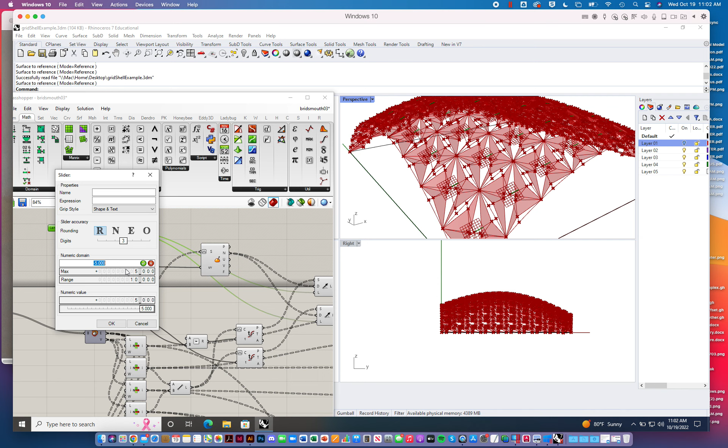Let's see, -10, 10. And again, everything flows from left to right still, so I can make this deeper or shallower or whatever. Right? Spiky, less spiky, more spiky. Make it look like it's growing hair. Armadillo. You know, that looks like something in the Mojave Desert, right?

I mean, look at plants in the Mojave Desert, they're mean. You know what I mean? Like, you have to survive out there, right? I mean, it's one thing to gather up a little bit of resources in the soil, but then to also try to prevent you from getting eaten by a bird. You know, say, if you're going to take me, bird, you're going to lose an eye or something. So, all right, an eye for an eye.